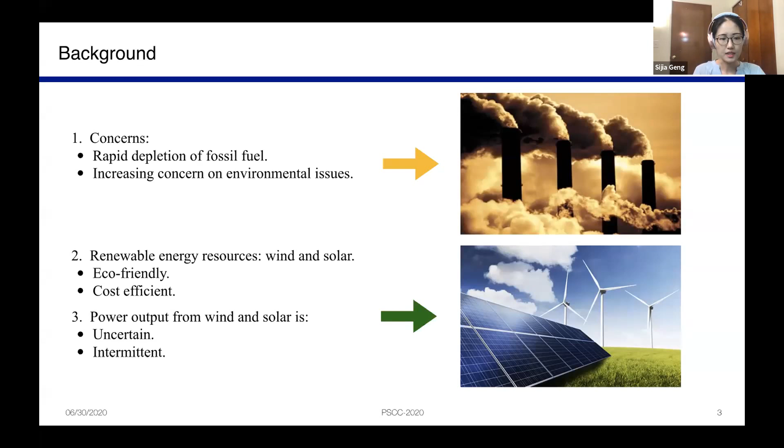Microgrids provide the opportunity to incorporate more renewables. Microgrid is a small-scale power system that groups a variety of distributed energy resources, especially renewables, together with energy storage and loads to provide better control and operation. Microgrid can operate off-grid as a standalone system.

Furthermore, we consider the case with no backup generator to investigate the renewable-only setting. In this case, the battery is a necessary component to shift energy generation. Also, load shedding scheme is allowed in the case of limited renewable generation.

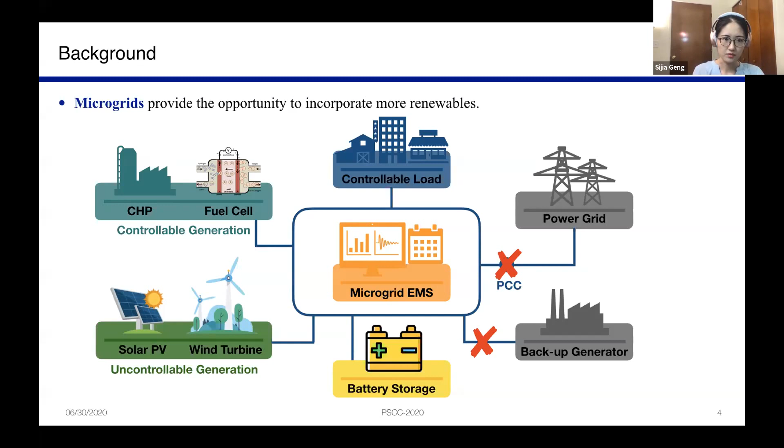The objective of this work is to optimally design the capacities of distributed energy resources in an islanded microgrid so that energy sufficiency is guaranteed and the design cost is minimized. The design process we propose can be extended to an energy hub setting with multiple energy carriers, which is addressed in our follow-up journal paper. The main challenge we have is to deal with the stochasticity in renewable resources and load.

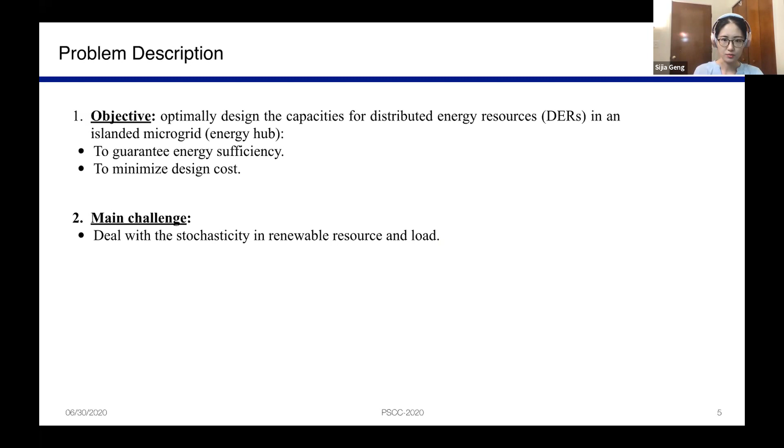The microgrid we considered is composed of renewable generation units, including wind turbine, solar PV, a battery energy storage system, and controllable load. Among these components, the wind turbine, solar PV, and load are modeled as stochastic units, which will be represented by time domain trajectories.

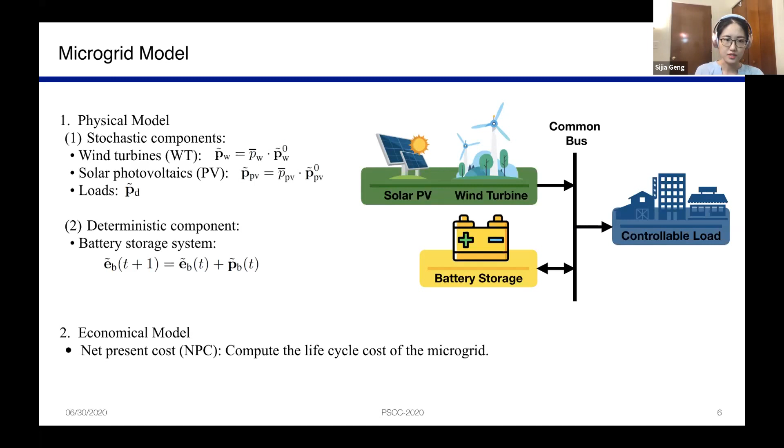The battery system is modeled as a deterministic first-order state of charge model. And the economic models of DERs are captured by the net present cost, which computes the life cycle cost of the microgrid.

The capacity design problem is formulated as a chance-constraint optimization problem of the form P0, where the constraint 1 is the chance constraint. Due to the existence of stochastic variables, instead of enforcing hard constraint, we only require the constraints to be satisfied with high probability so as to render a less conservative design.

Here, delta are the random variables. In our case, they are the random power generation from renewable units and the load. And X are the decision variables that are the component capacities. And epsilon is a pre-specified violation level.

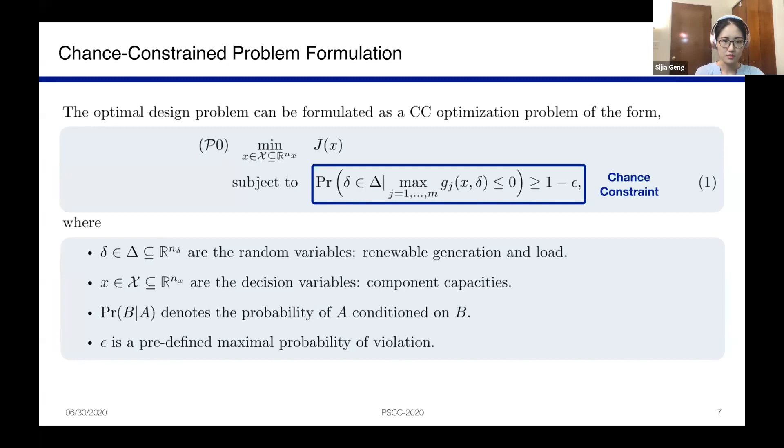So chance-constraint problem is in general very hard to solve. To render it tractable, control policies are designed to generate trajectories for battery charging, discharging, and load shedding under arbitrary generation and load conditions. To assist the design of affine policy for battery dispatch, we first assume a nominal trajectory for wind, solar, and load power.

We search for the nominal battery dispatch trajectory and the policy parameters. The affine policy is of the form of equation 2, where constraint 3 is to enforce that battery state of charge at the end of the horizon returns to its specified initial value.

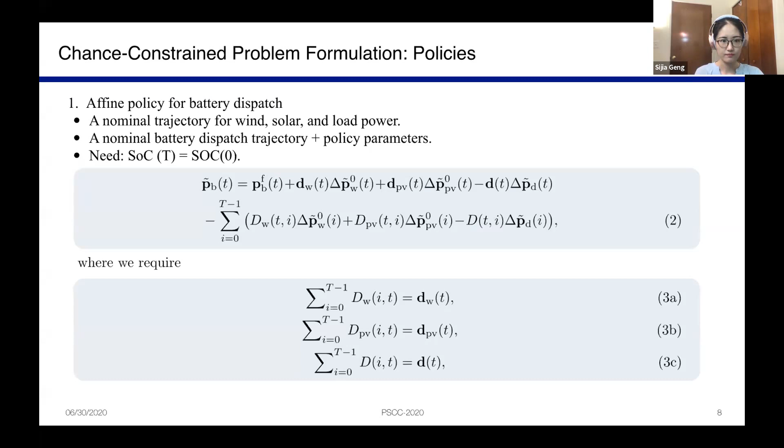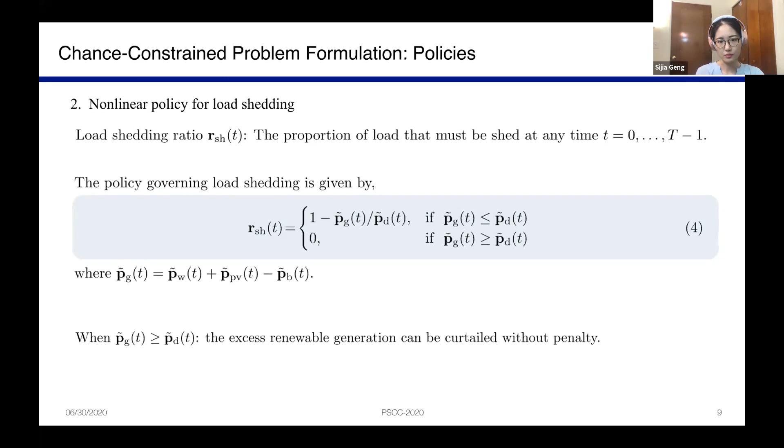The load shedding ratio R denotes the proportion of load that must be shed at any time t. The load shedding policy is given by equation 4. Note that this load shedding policy is not explicitly included in the optimization problem, but rather enters implicitly through power sufficiency requirements.

The capacity design problem is summarized as in problem P1. P1 designs the capacities for DERs and load shedding to guarantee energy sufficiency with a priori probability guarantee while minimizing the net present cost. The objective function consists of net present cost of all components together with the penalty on load shedding limit. We enforce a chance constraint for power sufficiency, battery power limit, and battery energy limit.

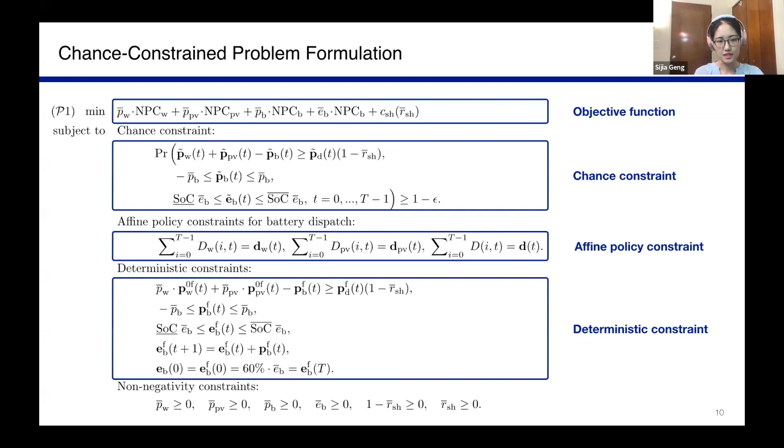The constraints for affine policy are included, and a set of deterministic constraints need to be enforced for the nominal trajectory. Finally, non-negativity constraints are included.

To solve the problem, a standard scenario-based approach, as in reference 1, can be used. However, scenario approach approximates the stochastic constraint by a set of scenarios, each of which is a realization of the random variables. Although scenario approach can solve P1 with probability guarantee, it requires a large number of scenarios, and this leads to a heavy computational burden. Moreover, a large data set with decades of records is hardly available.

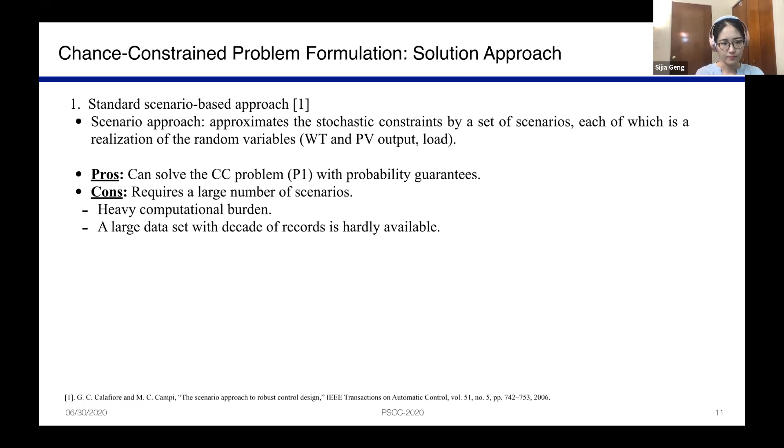We can instead use robust counterpart approach. This approach firstly constructs a chance constraint problem P2 to search for a hyperrectangle robust set for the uncertain variable. Next, a robust counterpart of the original problem P1 is solved with uncertain variables constrained to the robust set. This way, the computation requirement can be reduced significantly. However, this method may be conservative.

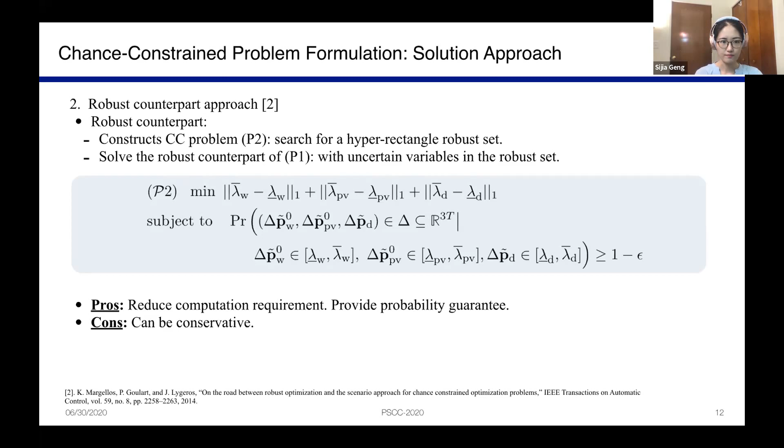The hyperrectangle robust set, as proposed in reference 2, will lead to a conservative result if the random vector has high dimension or large variance. In the following, I will present 2 novel methods to improve the robust set formulation. They are the cutting-based approach and the PCA-based approach.

The first one is a cutting-based approach. So the box-shaped robust set is conservative because it completely loses sight of the temporal relationship in stochastic renewable generations and load. As a result, the design has to cope with minimal availability of wind and solar resources over the entire horizon, which is a rare case in reality.

We thereby propose a cutting-based approach to refine the hyperrectangle robust set so as to capture the temporal relationships and reduce the conservativeness. We introduce a hyperplane to cut out the unnecessary portion. So only one extra design variable is introduced in P2 that describes the distance of the hyperplane to the corner. Thus, we can achieve the same probability guarantee by only introducing a small number of extra scenarios.

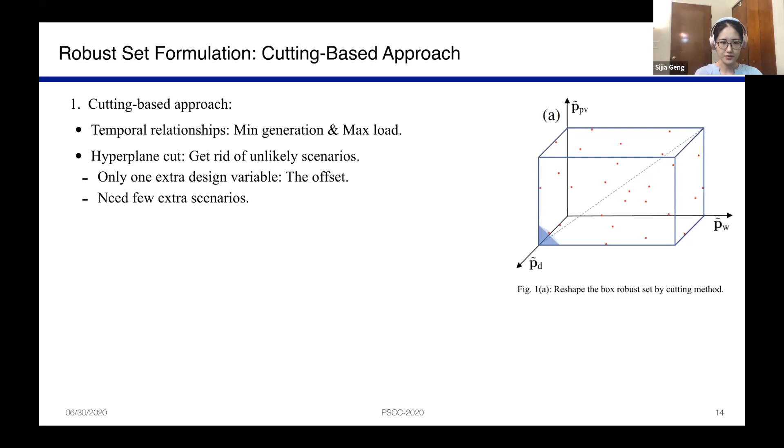We further exploit principal component analysis to reshape the robust set. PCA analysis converts the data into a new set of coordinates, the principal components. These PCs are arranged in a descending sense, such that the first PCs capture most of the variations in the data. Under the guidance of PCA, we introduce 2 hyperplanes for each PC. These 2 hyperplanes are normal to the PC direction, and their offsets to the origin are determined by the 2 outermost data points in the PC direction.

As illustrated by figure 1b, the intersection of the half spaces defined by these 4 hyperplanes gives rise to a hyperrectangle, the light blue rectangle, in the PC space. Intersecting this set with the original robust set, the gray rectangle, gives us a smaller robust set that is a polytope with red boundary. The refined robust set still encompasses all the data points and is less conservative. This allows for more flexible control policy for battery dispatch.

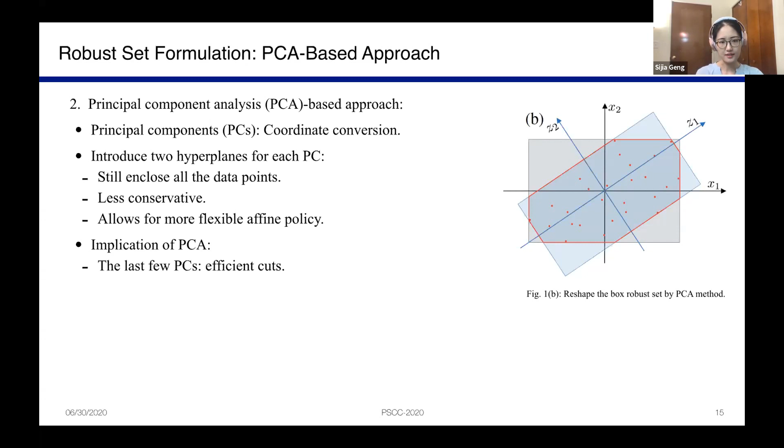And as an implication of PCA, the last few PCs contain the least variance in the data, which suggests efficient cuts. With the proposed robust set, we can now reformulate chance constraint problem P1 into its robust counterpart, referred to as P3. Problem P3 is a robust linear program with polytopic uncertainty set, which can be transformed into a regular LP through taking the dual. By proposition 1 of reference 2, any feasible solution of P3 is an epsilon level feasible solution to P1 with probability at least 1 minus beta.

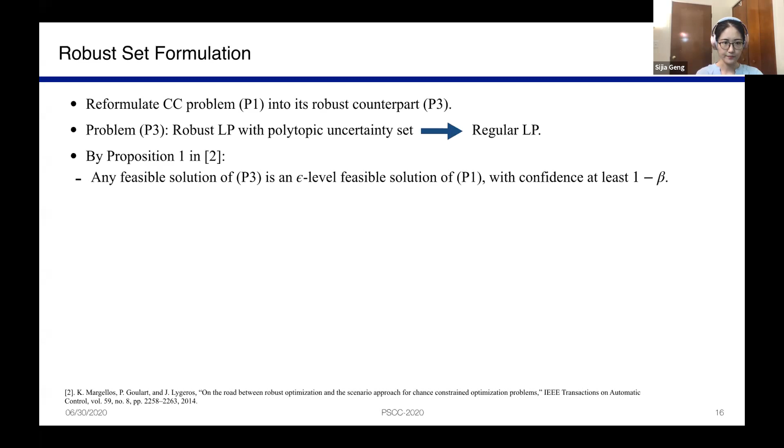The test results will be discussed in the following. In this work, we use true generation and load data from online database. The economic model parameters are summarized in table 1. For chance constraint specifications, we give a violation level epsilon of 0.1 and confidence parameter beta of 0.1%.

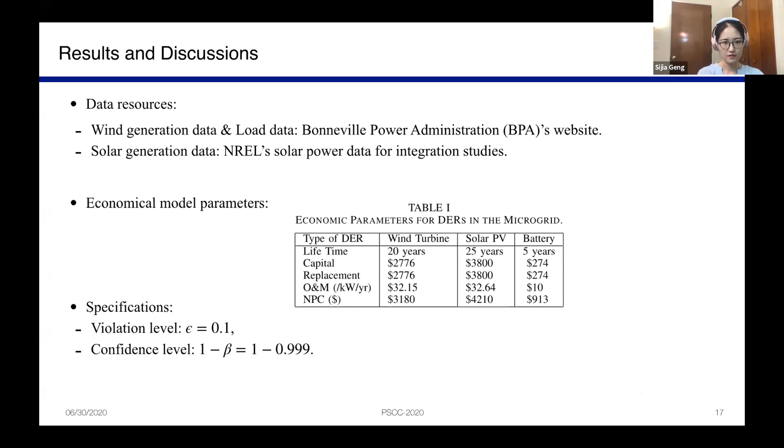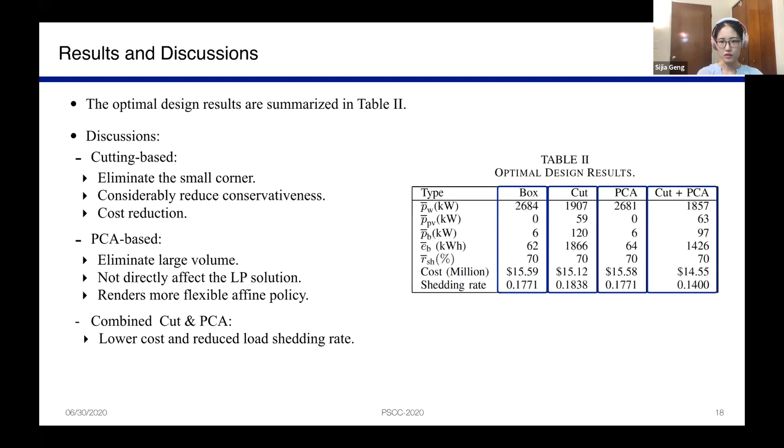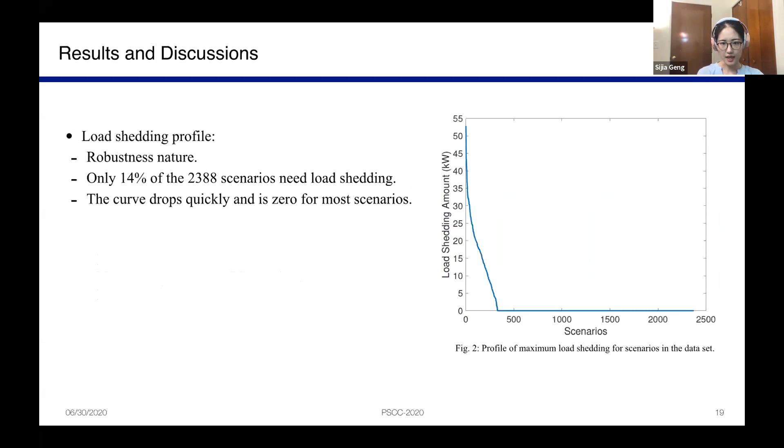Due to the robust nature of our approach, scenarios that actually require load shedding are rare, and the amount of load shedding is small for most of them. For the combined method, among the entire about 2,400 scenarios, only 14% require some load shedding. Figure 2 shows a profile for the maximum load shedding for each of the scenarios, ordered from the highest amount to the lowest. The curve drops quickly and is 0 for most of the scenarios.

In this case, have 1 minute.